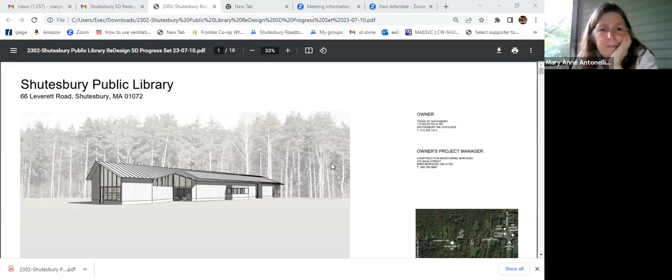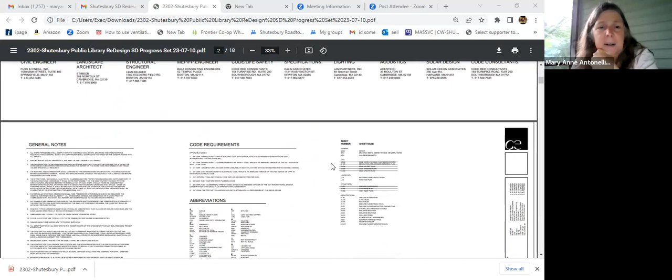So this is the exterior. A lot of this is really very detailed. I'm going to go to the site plan, and this is a draft of the site plan.

Jeff and Stephen, do either of you feel like describing this site plan to the rest of the committee? Or do you want me to do it? I guess I'll just do it. Let's see, so they moved the building closer. The roadway is... it's hard for me to describe this site plan.

When we discussed this last week, it's a single loop roadway where people drive in, go around the loop, and then drive back out. It looks to me like this area on the eastern side is possibly a reinforced area for some overflow parking. That was a big part of our discussion last week, that there should be some area off the side of the road for overflow parking when we have higher capacity in the library. It looks like there are 12 dedicated parking spaces, and a simple walkway that goes around the perimeter of the building.

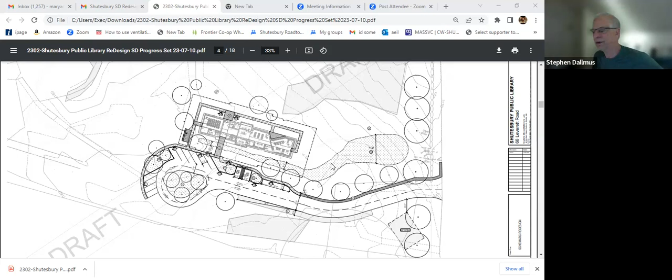Okay, but other than that, it's what we talked about before, the layout. On the site plan, Mary Anne, that area on the east that's kind of light gray along the roadway, that's listed in their index as gravel shoulder. And then the area that starts thin in front of the building and runs all the way down towards Leverett Road and gets fatter, that's just listed as planting area. There's nothing that clearly talks about the bioswale at this point, although I think that's going to be what that is, but Greg did say that last week.

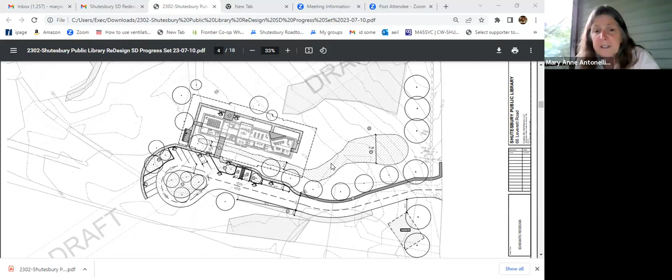And so that was there last week, but the gravel shoulder is new, and that was in response to our conversation. And that looks pretty long, which is nice. I'll go on to the next slide. Lauren, do you think this is the site plan? Let me look.

The closest to the floor plan. There's one farther down that has the furniture on it that I think is more okay, better to talk about.

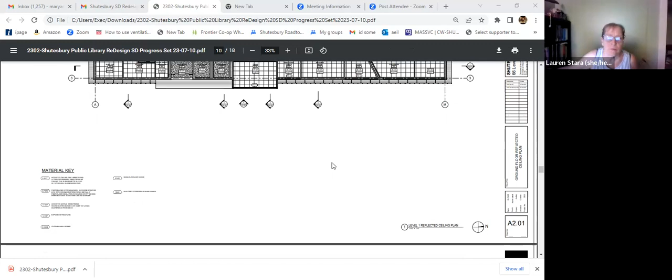Oh, so look at this. Do you see on this one how the roof is now asymmetrical?

So when they were having conversations with their structural engineer, and Jeff and Stephen jump in, the structural engineer said that when the roof was a symmetrical gable, there would have to be steel cable ties connecting to either side and to the structure of the roof to provide structural support for the building.

And so that would have an aesthetic effect on the interior of the building. These things would be visible, and it would be more expensive because it involved bringing in a whole different type of trades person to design and construct and install those things.

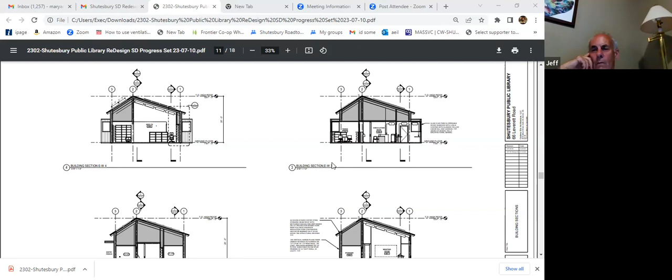So a solution that they suggested was having a slightly different, asymmetrical pitch to the gable, where the eastern side is shorter and the western side is longer. And so then the ridge falls on the building wall that runs down the center of the building.

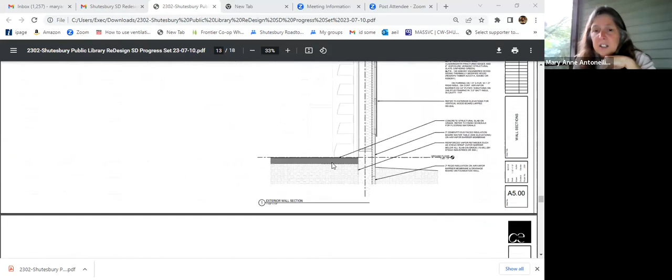And it ends up changing how much solar will be on each side, but it's still going to be adequate solar coverage. And we, meaning the design subcommittee, didn't mind the asymmetrical gable. We thought it actually added character to the building in different ways. And that was just a good way to see it.

So I'm going to keep going down and find... there you go. So this is the floor plan with the furniture.

And so Lauren asked if there was acoustical separation between the book drop room and the meeting room, and Dominic answered that there is.

And so the changes they made based on our previous meeting was moving the book drop room going into that closet in the meeting room. And I just thought the book drop would end up getting covered by things stored in the closet.

So they moved the kitchen down slightly, so the kitchen is really just going to be almost like a closet itself. And then that's the book drop room.

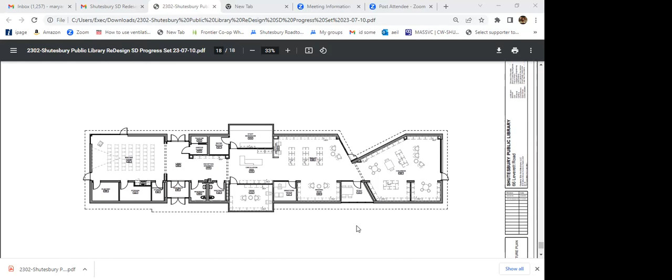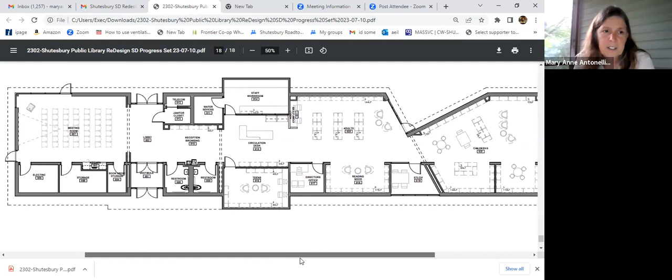Excuse me, Mary Ann. Is it possible for you to click the plus sign and make it a little bigger, where it says 33% on that black bar? Yeah, with that... oh, whoa, okay, that went... okay, cool, thank you. There's 33, and there's 50. Can you just slide it up and down, and sideways? There you go, sideways. Oh, here we go, sideways. Ooh, too much. Stupid thing. Here we go. There we go, that's it. Thank you very much. That's all much better.

So let's see, in our meeting last week they told us they had bumped out, they were concerned about the amount of space between the circulation desk and the teen room, so they bumped out the staff workroom by a foot.

The MBLC, both last weekend and then today in Lauren's comments, said that they're concerned there's very little storage in this plan. So I asked for storage on that back wall of the staff workroom instead of glazing, maybe with clerestory windows at the top.

And this is still a plan in development, and those are things that we can clarify during the design phase.

Let's see, and then Lauren suggested, so they've got 5 shelf high. I can't see, are they all 5 shelf high around the children's room? You had a comment. They are, they're all 5 high around the perimeter.

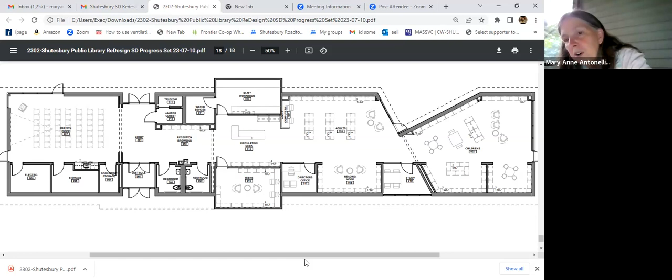But the two small sections - there's a table with 4 chairs and then a table with 2 chairs that looks like a computer table, and then a section of little mobile picture book bins there, and then there's another one in this other nook. So I think they're thinking of those as

shorter shelving. And then they've talked about coming from the... let's see.

So in the children's room, at the top of the plan, there's a darker line, and I think they have that as kind of a bench. During design, we're just going to make sure there's enough shelving so we can have materials for our smallest patrons accessible and shelved nicely. I don't know that we need a bench that long.

And what was your other comment, Lauren? My other comment is the fact that the telecom server room opens out of the janitor's closet, which I find very problematic. I think they can rework those spaces so you can get to it from the staff workroom. Yeah, I think so too.

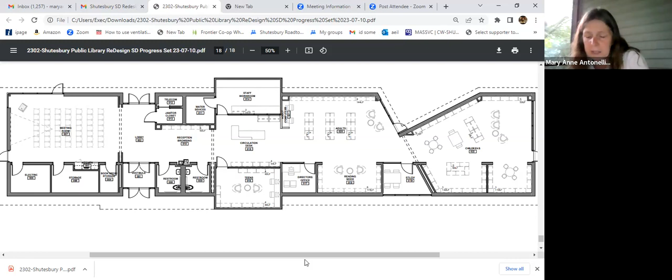I think that's good. And then Elaine sent a comment - she was concerned. Jeff had brought up the amount of windows and the very high windows during our meeting last week. Let me scroll down and see it. No, they don't have that - oh, maybe it's because it's too big. No, this is 18 of 18. Okay, so they had an interior view, which was in the presentation, which I'm pretty sure I sent to all of you, and we'll get it posted on the website.

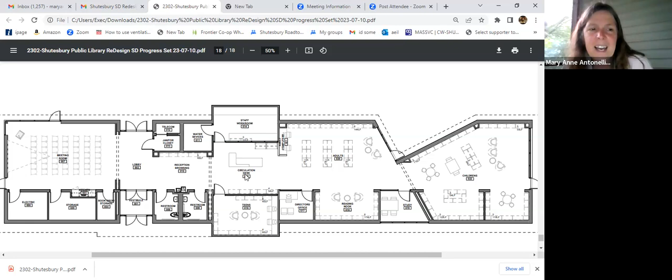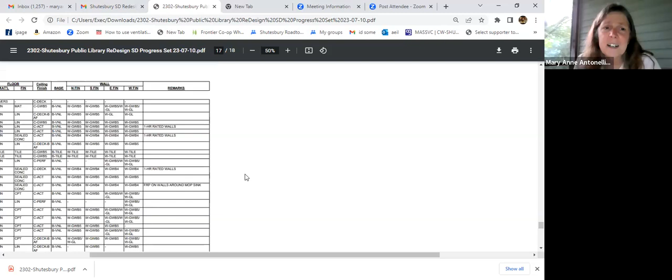But over the door in the community meeting room, there's a window, a very large piece of glass that extends all the way to the ceiling. You can see it on the building elevations. I'll go back. Jeff had suggested that he wasn't going to be the one to clean those, and I didn't know who it was going to be.

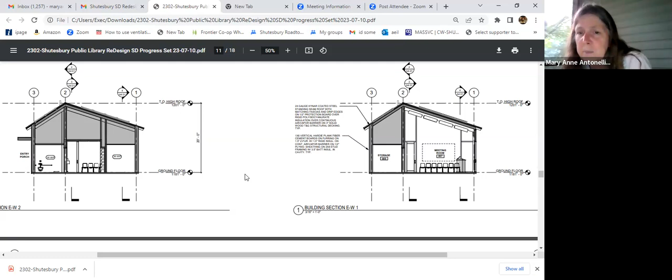So I brought that up again today and asked, since we've already expressed this - you can see it here where it says building, on the side of the screen. Can you see it, Jeff? Or can you see it better in a different drawing? There's a South elevation. Okay, alright.

So Jeff suggested we maybe don't need that window all the way to the ceiling above the door, but I don't think that's going to have a dramatic effect on the cost estimate. Does anybody think it's going to have a dramatic effect? No, no. So I just asked them to analyze where we have glass, where we don't, and how big the panes are. Okay, that's DD type stuff.

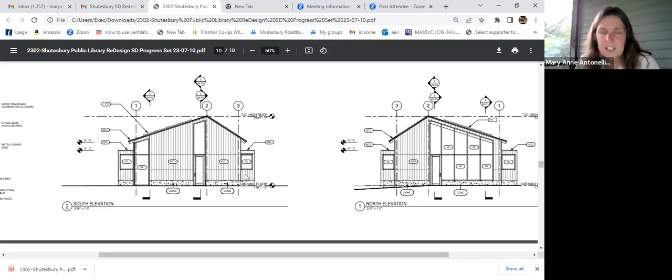Right, so those are the conversations we've had. Does anybody want me to slide to anything else? I have a few questions which I couldn't figure out. When we go to the wall section - keep going down, no, the other way.

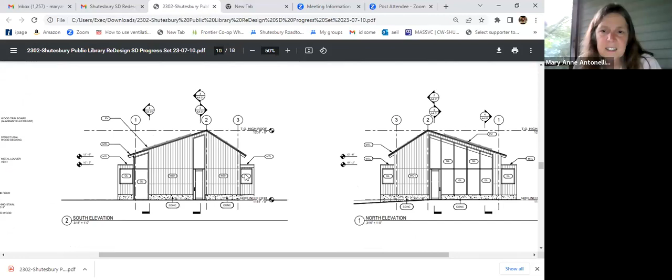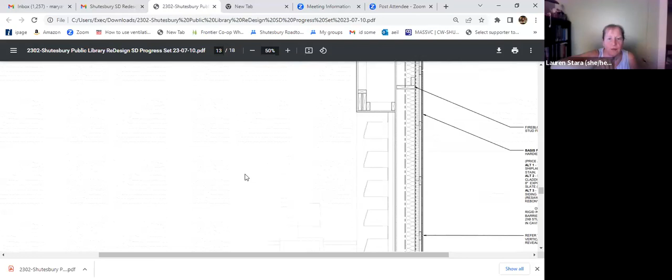No, they don't have the structural drawing in here, and I'm a little confused. Keep going - oh, here we go, structural. Yeah, go one more. Okay, there's a wall section in there - he wants a wall section, not a building section. There you go, okay, there we go. I'm a little confused as to what is the structural system for the roof.

Because they make a comment in here about glu-lam beams, but then they also have 2x rafters, and they say look at the structural drawings, but there's no structural drawings. Okay, so it'll be interesting someday to be able to compare that, because at the moment I'm not understanding the structural system to my satisfaction.

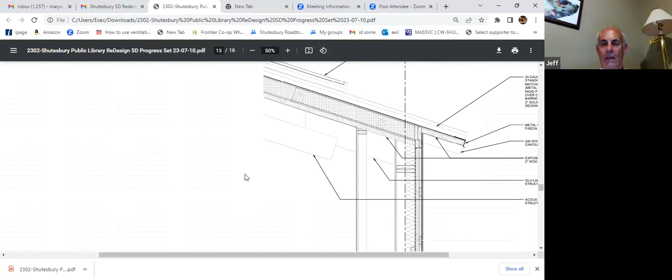And so when we have a meeting with them, we can bring that up. Well, hopefully they give the cost estimator a structural drawing. And when they send out the complete set, I'm going to write that down and note you have a question about the structural roof framing.

Because Matt also talked at one time about steel columns - are we doing steel columns or not? There's nothing in these drawings that tells anybody. I do think they were moving away from steel columns, but I thought the steel columns were before they reduced the building in width, before we moved this plan. That could be one of the options.

Do you have other questions or thoughts, Jeff? Because I have a number of things. Well, I was also wondering if they've talked to their structural guy about using scissor trusses for the open areas as opposed to glu-lam and 2x, but again we can't tell from these drawings. So I think once we get a structural drawing that would help us. But if this is the set going to the cost estimator, I don't know what it is they're pricing.

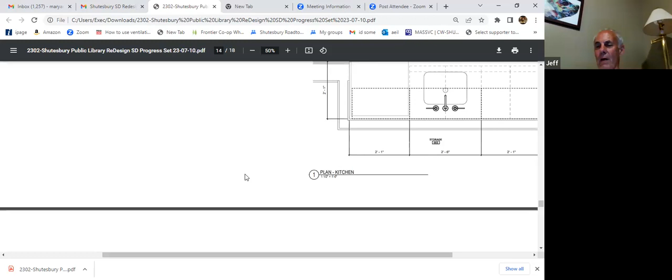The only other issue, a couple other issues - one, I'm a little confused which exterior wall section is the one they're going with. They seem to not be the same. If you compare that to what's on the drawing before, they're not the same, or that other bigger wall, that one. I know they're looking for alternates for the outside material, but the rest of it isn't exactly the same.

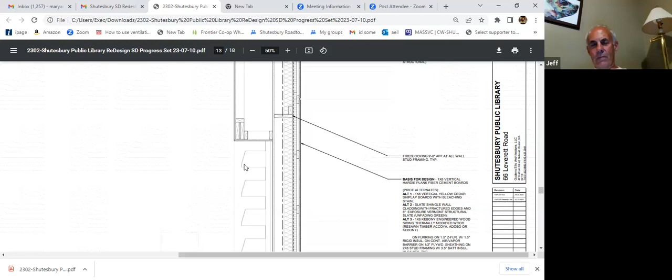Again, what's the cost estimate or pricing based on? Okay, and I guess my last question is if you could go to those building sections - are they up or down? There you go, stop. Okay, so move the drawing up a little bit.

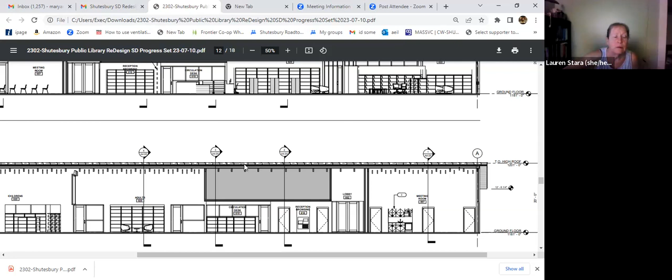So you see those dark gray areas above the ceiling, that big gray box - is that a heated space or a non-heated space? Because it runs the length of the building. I think that's mechanical attic space, but I don't know whether it's conditioned or not. Right, because I'm wondering, are we going to condition all that area, even though we can't store anything up there?

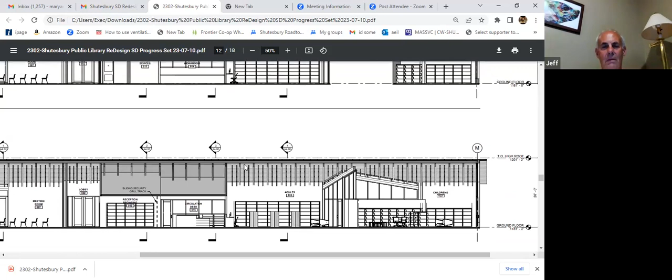Because if you go to the other building sections looking the other way, which would be drawing A405 maybe - the other building section, I don't know which way it is. Keep going. Okay, there's a good one.

So look at the left, section EW2. See all that area that's gray? That's the way I'm interpreting it - that's space that we cannot use, but we may be heating it and cooling it, because they're saying the ceilings are sometimes drywall and sometimes just acoustic ceiling tile.

So again, is that all conditioned or unconditioned? That's a lot of area, that's a lot of volume. I see your question, Jeff - you're saying it's space within the thermal envelope of the roof and walls, but it's not conditioned space that's ventilated for occupancy. It's mechanical or attic space.

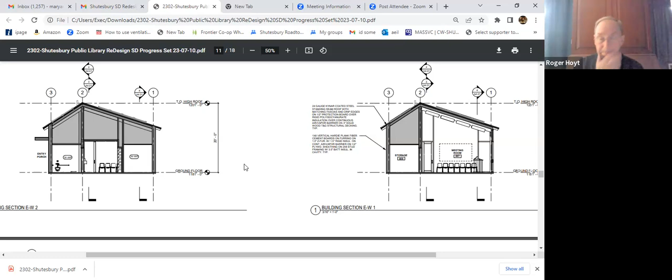Well, I don't think it can be - it's non-usable space. Yes, I think that's what the tone is indicating, that it's not usable space, whereas in the other section they had talked about those areas being where mechanical equipment would be - which again is non-usable space. Because I assume if we were to store stuff up there, we'd have to sprinkler it and we'd be back to that game again. We don't want to go there. But I think what this just does is get the mechanical space out of the square footage calculation.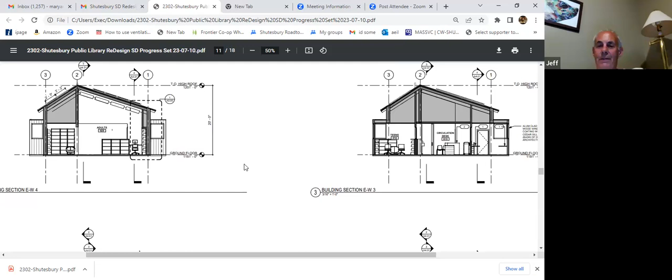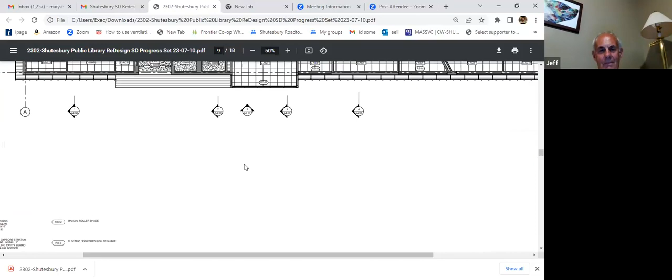But if you looked at the second or third drawing showing the plan of what they call - I'm going to call it the attic space - it's a lot of area. Keep going back towards the original first drawing, head that direction, keep going. I think it's one more. Yep, next one, I think that'll do it.

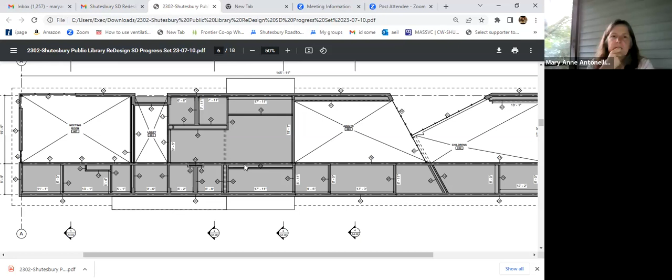There you go. So all that stuff that's in gray is, I think, heated but not usable space. And why is it heated? Because it's sitting inside the thermal envelope. Okay, how's that for a non-answer?

Well, isn't that - unless you purposely put registers for supply into that space, it's quote heated by some convection through the ceilings into that space, so it wouldn't be heated like the functional spaces people are in. Well, it could be or couldn't be - that's what I want them to tell me, what's happening up there.

Do you have anything else, Jeff? No, I think those are the main ones.

Okay, a couple things I would suggest. One is this pricing set only has one roof option, the metal roof, which personally I think would be my preference because it's going to last a very long time. You can mount the solar onto the standing seams, so there are no penetrations, and I think it's a more attractive looking roof.

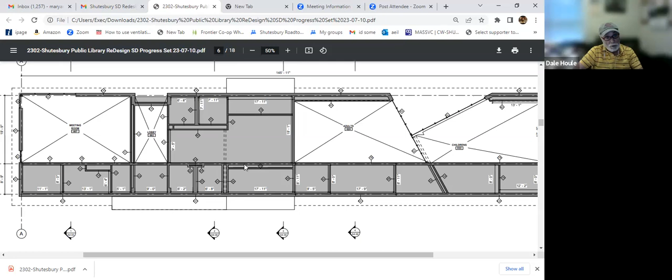But I think we should have an alternate for asphalt shingles. Boy, I disagree. The quality of asphalt shingles today is so bad that you can't get 25 years out of an asphalt roof without issues, and I just don't want to see that. I've got less than a 10-year-old roof on my own house that I'm very disappointed in, and I don't want to see that on a library. So there's no way I'm going to support asphalt shingles. I'll just throw that out there. I'm not going to do it.

I thought we had a discussion about this last time. They also didn't want to go with asphalt because of all the mechanical attachments of the solar system—there would be lots of penetrations through the roof. They thought this, and I agree with them, is a better solution. Well, I totally agree with them.

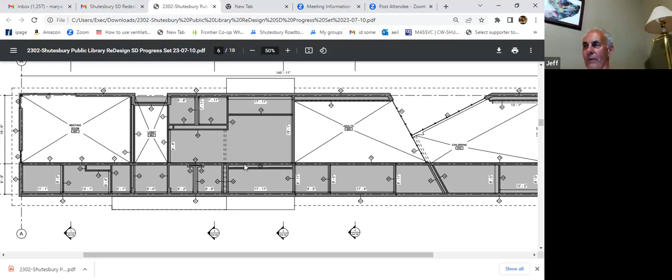But if we are at a point where we have to cut more fat, so to speak, I think it would be prudent to just have the estimate include asphalt shingles as an alternate. I don't have an issue with getting a number, but I think I would have an issue with actually going with asphalt. Well, I agree too, but I think that would be worth having as an alternate.

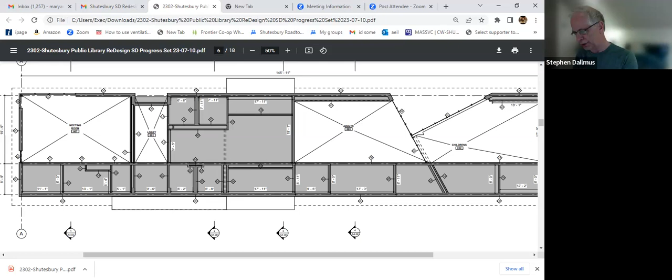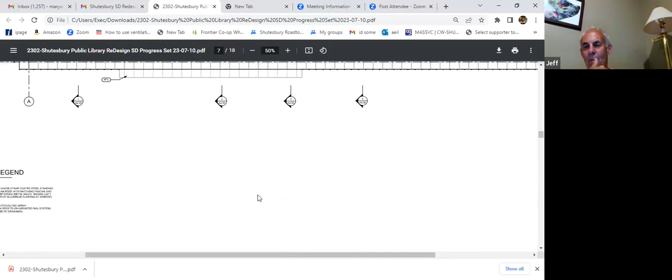If we go to the large building section, the exterior wall, that's sheet A5. It's the other way, pretty far down—towards the back side of the end of the drawings, like 2/3 of the way down. Okay, there you go. If we can hear you, we all get pizza too, Jeff.

So in that wall section, which is a 2x8, they show 3.5-inch fiberglass batts. I don't understand—if they were here, the question would be, why isn't that cavity full of insulation? I've got the answer. Okay, what's the answer?

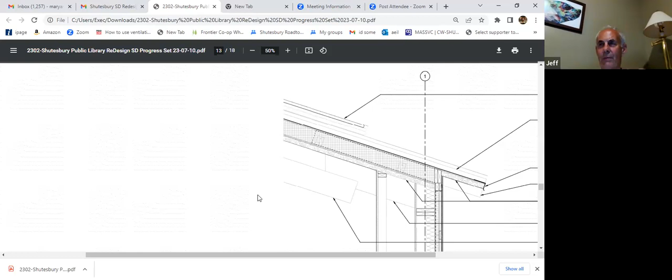Because if you read about the latest building sciences, you do not want to make the outside of the sheathing in the wintertime so cold that you get condensation, which would then create water. So you insulate on the outside like they're doing with rigid, which helps keep the outside of the sheathing warm, so you don't over-insulate on the inside. You've got to keep that outside sheathing above the dew point—you have to be concerned about the dew point level around here, especially in the wintertime.

Okay, well, there's a company called Building Science Corporation, BSC, out of Boston, and they're really experts in this stuff. You may want to Google them—they've got a really good book explaining all this, and they would do a much better job than I just did. But you may want to peruse that.

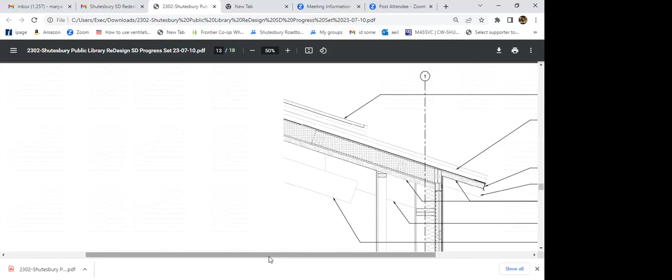Well, I still—Marianne, could you slide the drawing a little to the right so we can see the bubbles, or the writing, whatever? Thank you.

Okay, well, my understanding, maybe I'm wrong, was that you can still insulate the wall cavity full, but by putting the rigid insulation on the outside, you prevent a dew point condition. So I'll check that out a little. But second—

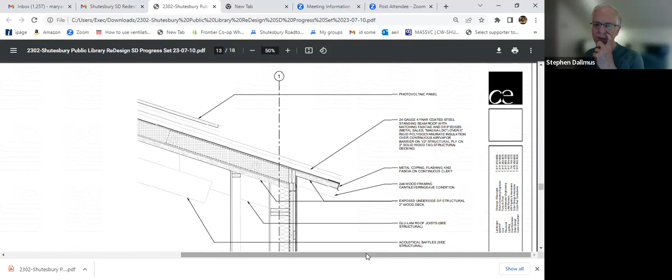I question the use of fiberglass as opposed to something like dense packed cellulose. Dense packed cellulose is much greener—if we're trying to build a green building, that's one way to do it. But also the thermal efficiency of fiberglass tends to fall off quite a bit once it gets to freezing temperatures, and it doesn't handle temperature extremes and fluctuations well, whereas dense packed cellulose does. There are pros and cons to every insulation, but I think minimally there should be an alternate for using dense packed cellulose as opposed to fiberglass.

Yeah, Marianne, could you scroll down a little bit further on the drawing? Maybe there's some more notes that identify the materials. One thing I'd like to say about this concerning...

Insulation, Stephen, I know you're very concerned about it, but Shutesbury is a stretch code community. And as such, Shutesbury has to be at the very forefront of all the insulation stuff. We may not even get a chance to decide what the insulation is going to be on this building. It might be dictated. But the thing you should be aware of is that as a stretch code community, we're not going to fall short on insulation.

It just can't happen. So I think basically what we're seeing with these drawings are file drawings of some sort or another. That's why I think they've tried to apply some drawings that they have to this instance, and they don't all fit, which is why it's not consistent — that's the point Jeff has made, and Stephen as well. So this whole stuff has to be fleshed out a good deal more. But they've given us something to look at, and we picked it apart probably a little further than what they might be comfortable with. But anyhow, I think that's the story with that.

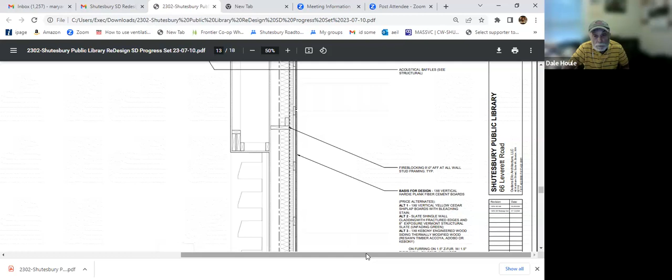Yeah, and we'll nail this down in DD. Well, since we're going for another estimate, my opinion is it's worth having some of these things as, we'll say, alternates. For instance, the dense packed cellulose is more expensive than the fiberglass to install. And the other thing I was looking at — Dale, if the stretch code requires more insulation, then obviously it'll be something that'll have to be added. But if their drawings don't show any of that, that's what's going out for an estimate right now.

I also was thinking, if you go back to the top of this detail, Mary Ann. I don't know what happened. I'm working on it.

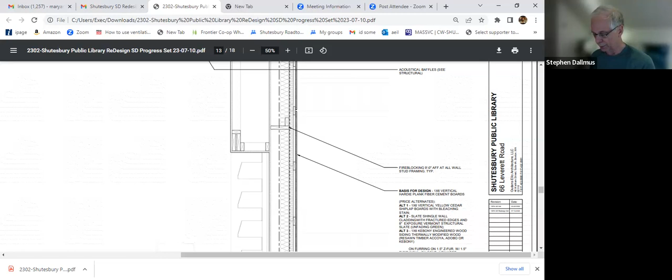Okay, they show 5 inches of rigid polyisocyanurate or something like that for insulation, and that gets you an R30 value. If you go with 2 layers, that's 7 inches, that gets you an R40 value. Which way are we going, Stephen, to the roof of this? The roof. So just, there you go, where you can see it talks about the 5 inches of the rigid. I obviously don't know what the stretch code says, but again, I would get an alternate for doing the 7 inches, which gives you an R40.

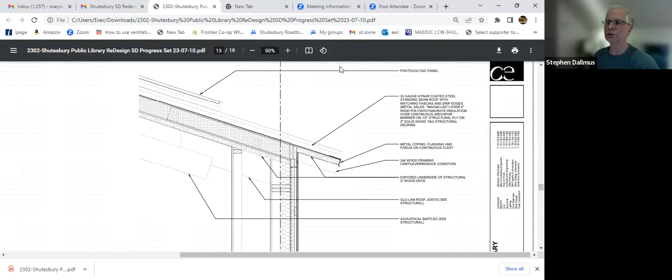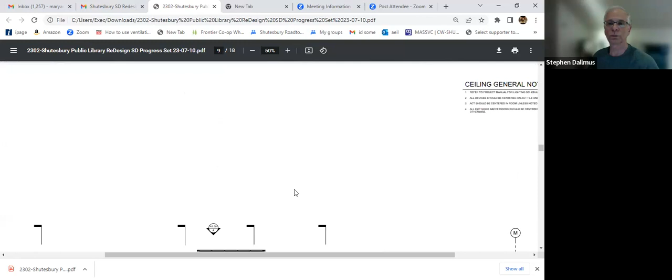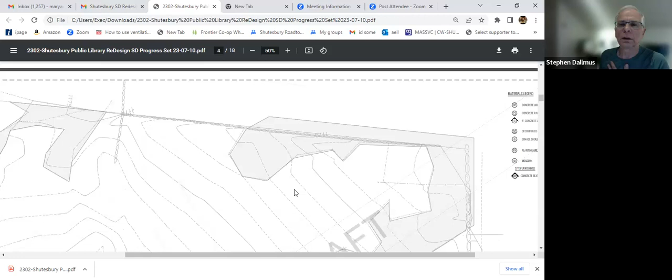And then I had some questions — maybe you know some of these answers, Jeff — on I think it's sheet A1.11. It's one of the very first ones up near the top, Mary Ann, where it shows a plan and the floor surfaces. Oh, it must be further down. Yeah, if you can see the drawing information at the right edge of the drawing, it's sheet A1.11.

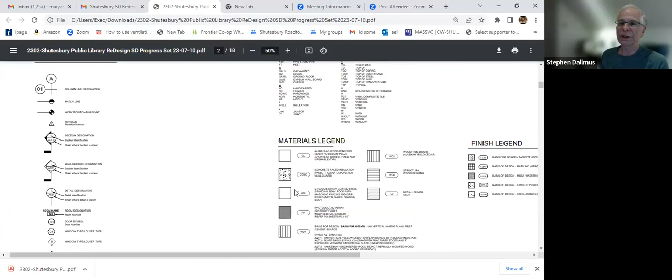Okay, do you have a page number for that, Stephen? That's it, sheet A1.11. You're going the wrong way, Mary Ann. Okay, and then maybe shift to the right. Yeah, there you go. Are you looking for a floor plan? The one that shows the flooring materials. Oh, okay, keep going. A1.01, okay, all righty. Hold it. I think you just passed it. Right there.

Okay, so if you're looking at that, one area is Tarkett linoleum. I think that's the meeting room, the lobby, the reception, and the circulation desk. Is this it? Yeah, okay, all right, this is the floor finish. Tarkett linoleum, I assume that's a manufacturer. But then the other option is finished RetroPlate concrete.

Do you know what that is, Jeff? I have no idea, I saw that too and I don't know what that means. Okay, so Roger, do you know what that means? I was asking Roger, do you know what that means? I'm not familiar with those terms. I'm not either. I know they've talked about polished concrete, which could be what it is.

Does it say what rooms it's in? It's the meeting room, the lobby, the reception, and the circulation desk. Is that the finished concrete or the linoleum? It's either or — it's the Tarkett linoleum or the finished RetroPlate concrete. Hang on a sec, let me look at this. I was just assuming that's some kind of polished concrete, but I'm not familiar with the terms.

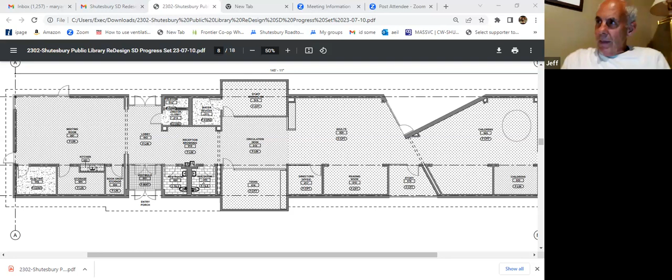It looks like it comes in plank, roll, or tile. Okay. Because we may want to keep in mind that we're gonna have to fix this building periodically and refresh it, and we should make maybe some of the right decisions at the beginning.

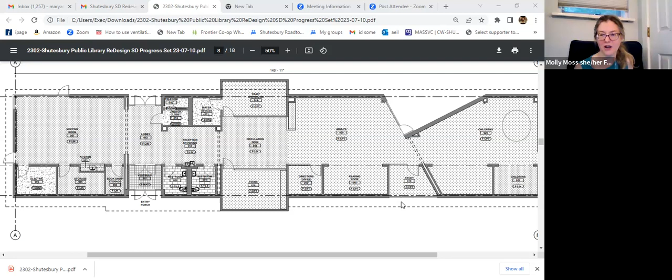I've put carpet tile down in a number of places and I have never bought enough extra squares ever. Even when I know I haven't, and I'm very conscious about buying enough, I do not. It's hard to, we need to replace them more than we should.

Okay, you won't be on that committee. And it's inevitable that when you go to buy more, it's been discontinued. Exactly, yeah.

Okay, so this is the draft of the pricing set, Mary Ann? And then they're gonna issue it, sorry, yes, this is the draft. So the real pricing set gets sent when, tomorrow? Yes, that's the goal. The goal is that the pricing set gets sent tomorrow, and so hopefully they'll do that.

So that it doesn't delay. I've been taking notes and I'll send them. Sorry, Doug, I can't figure out how to, I'm gonna stop sharing so that I can mute. Well, I don't want to mute myself if I'm talking.

So hopefully they'll get it out tomorrow, so that it doesn't delay us getting that information back. I don't feel like we have that many questions. No, no. And then we're all gonna get a copy of that? Yes, yes, okay, great.